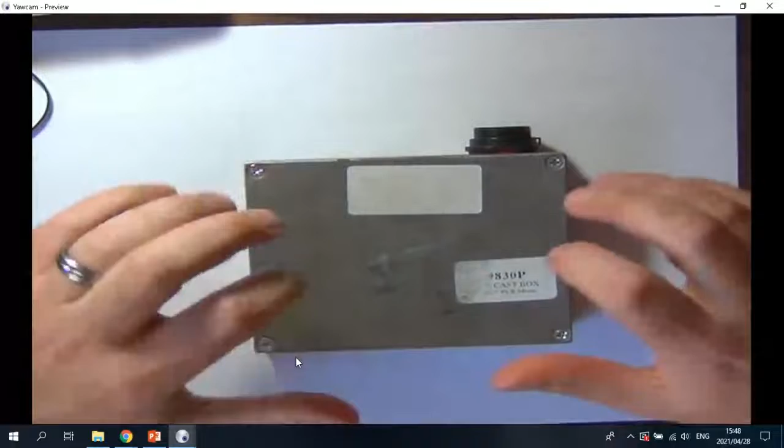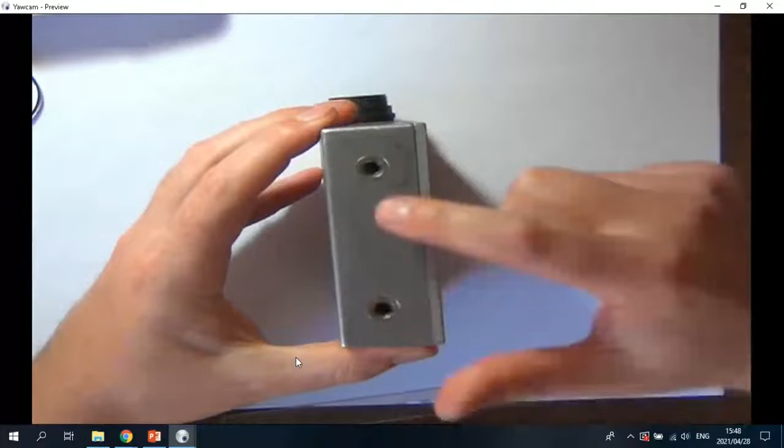Here we have a little box, and if we want to dimension it, we can give a main view, we can give the width, we can give the height, we can give the location of these screw holes, all of that. We can do a right-hand view, show the depth, you can show the draft angle if you want, because it's slightly smaller at the back than at the front. We can do a top view to show these holes. We can do a left-hand view to show those insert holes. We can do a bottom view. So for this shape, our standard views, main, right, left, top, bottom, and back, are actually sufficient to be able to dimension everything in this block.

But if we now have a component with a different shape, so over here I have my little precision scale. So there's the top view, and there you can see yourselves in the camera. Now you'll notice on this right hand side it is sloped. So if I wanted to give the dimensions for these 4 holes, I can't give it in the top view because they are actually at an angle. A very slight angle, but still an angle, meaning these circles are oval in the top view. And this rectangle, that line there, isn't the true shape.

So what I'm going to need to do is construct a view where I look straight at that surface. Typically something like that. So basically I'm holding it now with the front higher off the table than the back, so that we can view straight at the surface. So if I make an additional view straight at the surface, now I can dimension the spacing, size, and orientation of all of these features. So the normal main view, right hand view, and top view are not sufficient. I need to do some other extra view. And that is where our auxiliary views come in.

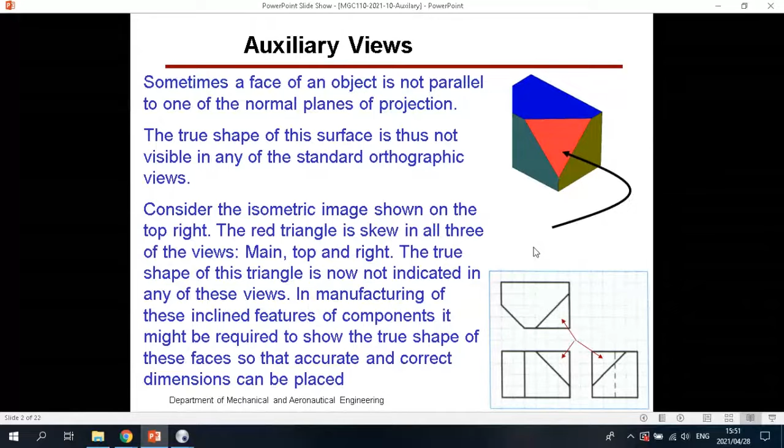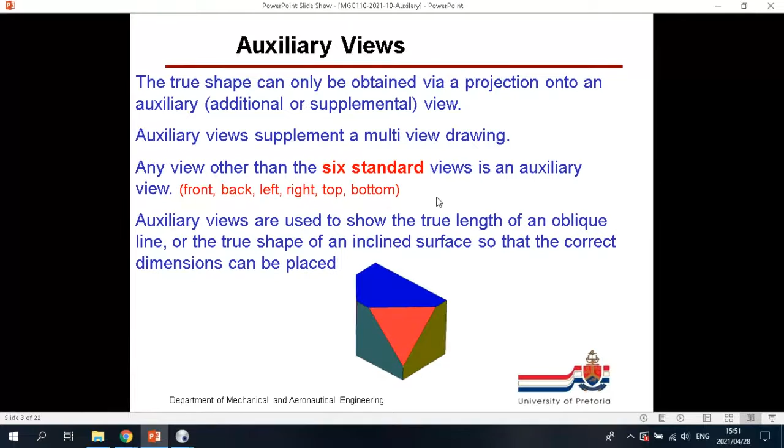Any view that is not one of your standard views, front, back, left, right, top, bottom, any view that's not one of those is an auxiliary view. Here's an example, a modification of that little friend of ours.

So we now moved the hole from this surface to that inclined surface. So if we wanted to dimension this circle, I'm just zooming in a bit. That circle in the right-hand view is oval, and in the top view it's oval as well, meaning we can't dimension that circle in the top or the right-hand view. Also can't dimension it in the main view because it's hidden detail.

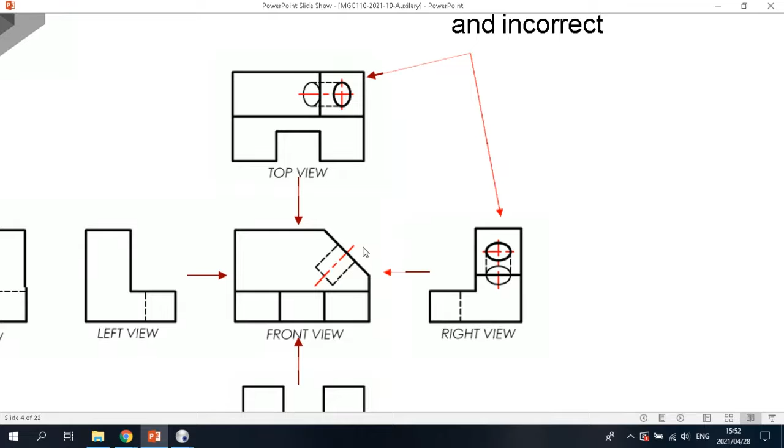We could probably make a little partial section and then dimension it like that, but that would only work if it's a circular hole. If it's a triangular hole, then all of them are useless. Then we have to make an auxiliary view to just show the detail there. So we look straight at the surface and project an auxiliary view to show the detail of that circle.

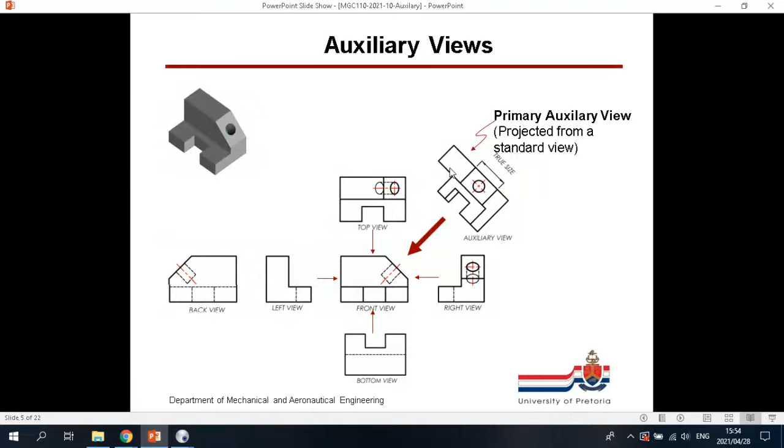So what I do is I make two partial views, a partial bottom view to show the radius over there, and a partial auxiliary view to show the hexagonal side. So sometimes it makes sense to only show the dimensionable features. This is where a partial auxiliary view is of great benefit. There's no point in us showing the entire background like with this one. Showing that thing there is pretty useless because this is all skew information. I can't dimension to that. So I just want to show the part that I can dimension.

So the hexagon is pretty easy. You just give the distance from that flat plane to that flat plane, distance from that one to that one, and the distance from there to there. If it is a perfect hexagonal shape, you can even give it a center mark and a constructed circle through all of its tips.

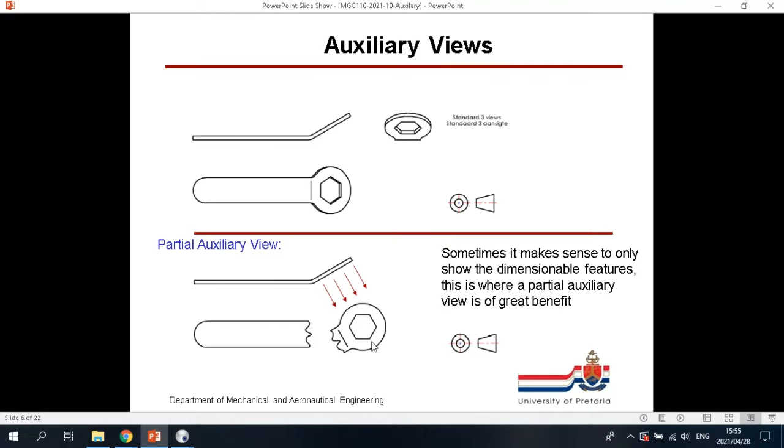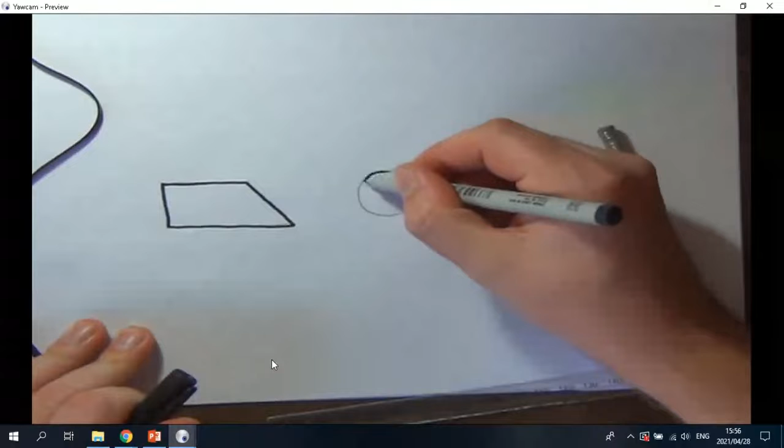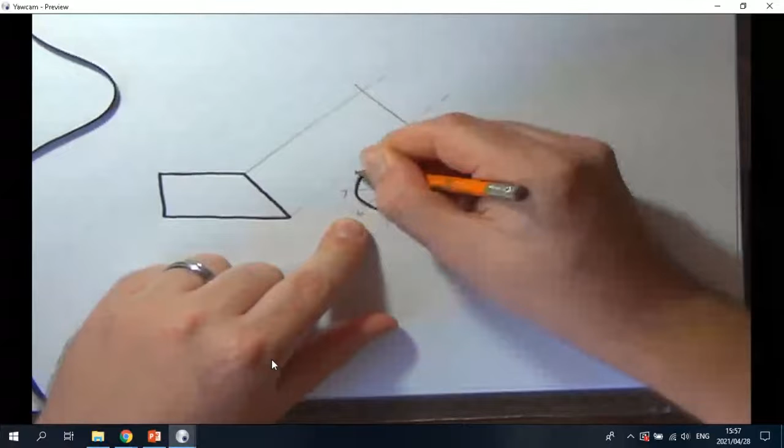Okay. So I want to project it at an angle so that I view straight at that surface. Now we must place this view somewhere. The exact location isn't important. So I'm just going to make a reference line over there. And I'm going to place a reference line, in this case, through the middle of the circle. The exact location of the reference line is irrelevant because it's just a reference. Now I'm going to divide the circle into 8 equal parts. There we have 8 equal parts.

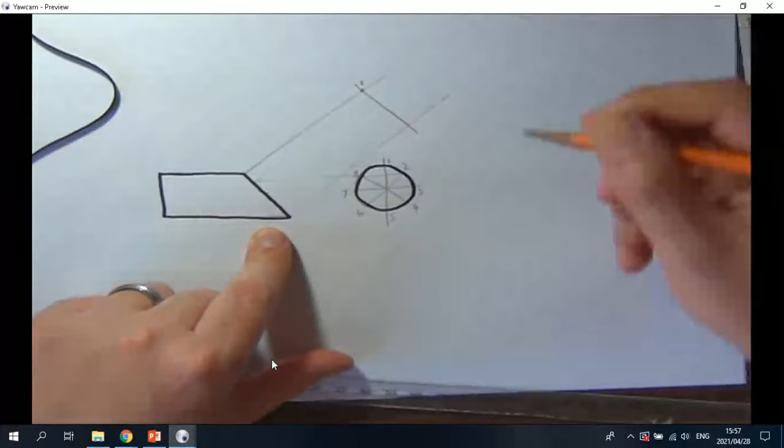And I'm now going to construct each of these points in my auxiliary view. So point number one lies on my reference plane. So I move it to this reference plane. It is still on the reference plane. There's point number one. Point number two. Now point number two is a certain distance from the reference line. I'm just using the ruler as an example. Obviously when we do this in class, we're not that worried about it. So that's about 8 millimeters.

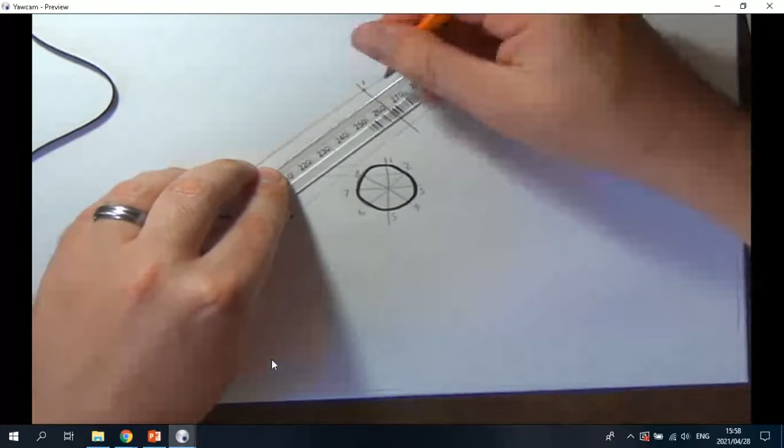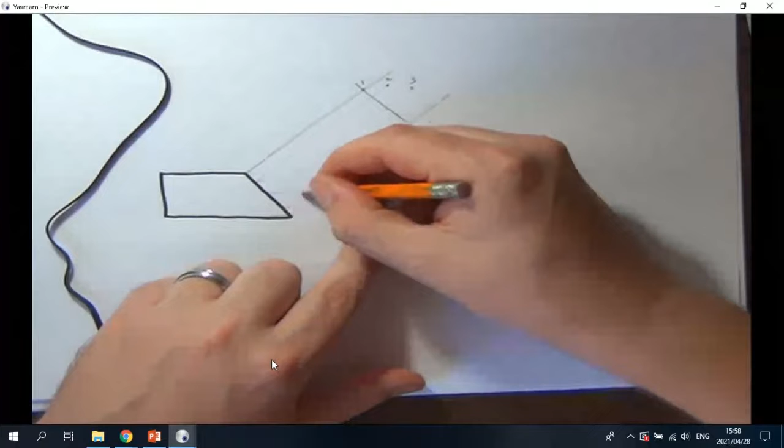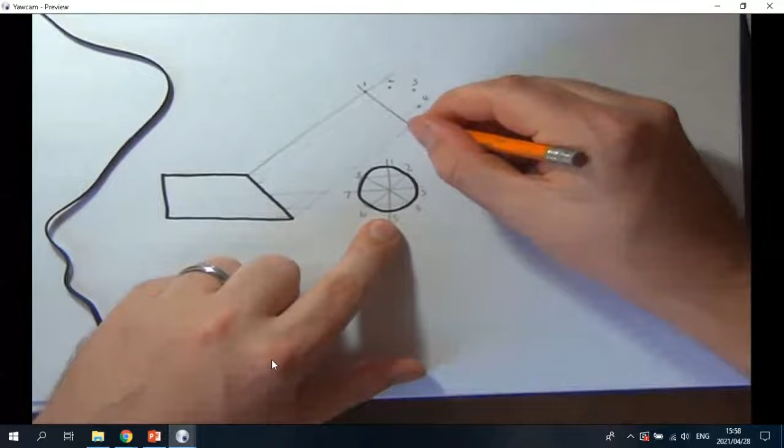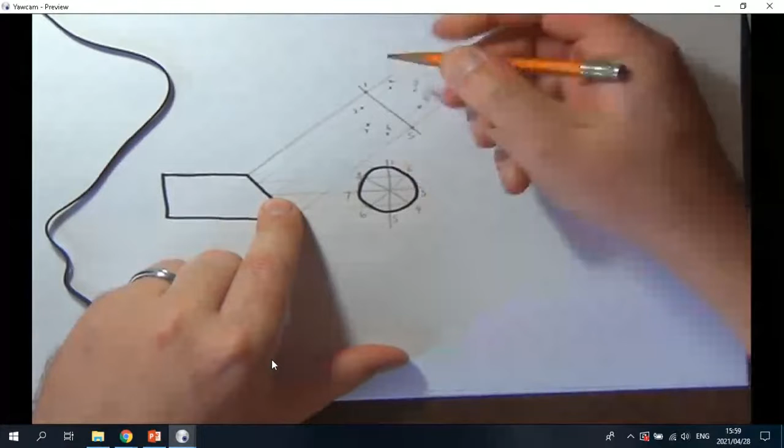There's point number two. Point number three is a bit further out. Point number four. Four and two are actually the same distance from the reference line. Point number five lies on the reference line. 6 is now to the left of the reference line. 7, 8. And now I'm just going to construct a smooth curve through those points.

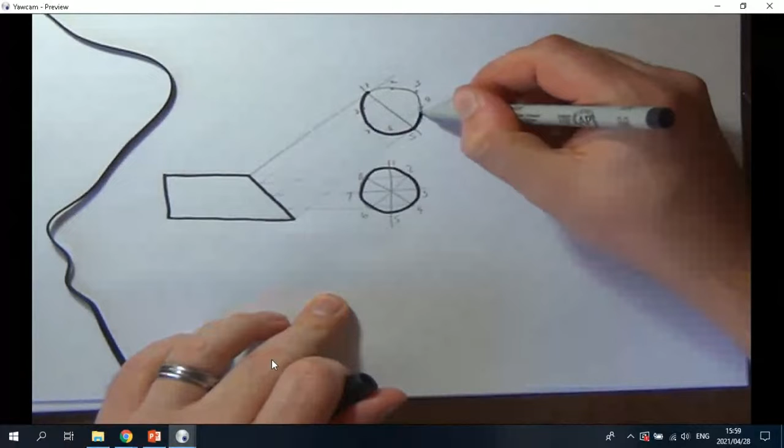Something like that. So that means that oval is now the true shape of that surface. You can see it's not circular anymore, it's slightly longer. If you wanted, you can even transfer the background information over. Okay, the background information isn't important at this stage.

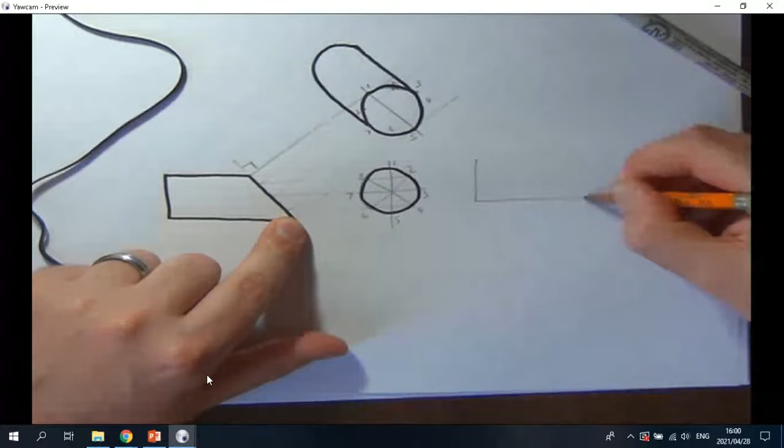So these lines are not specifically at 45 degrees. These lines are perpendicular to this surface. In other words, if the cylinder looked like that, then that angle would be 90 degrees.

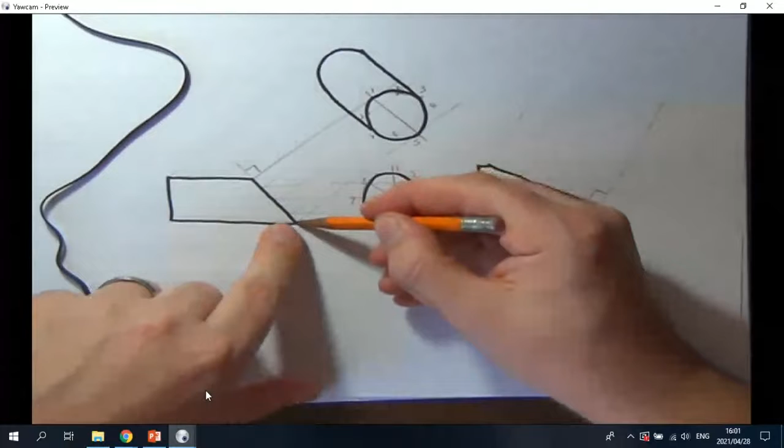So point number 1 and point number 5 lay at the top and the bottom of the circle, which lie on the reference line. So if I construct it over, that's where point number 5 lies in my main view. And perpendicular to that, that's where point number 5 lies on the reference line in my auxiliary view.

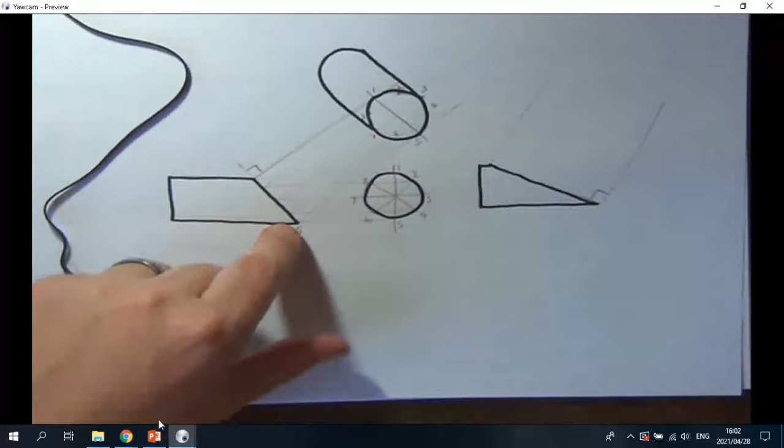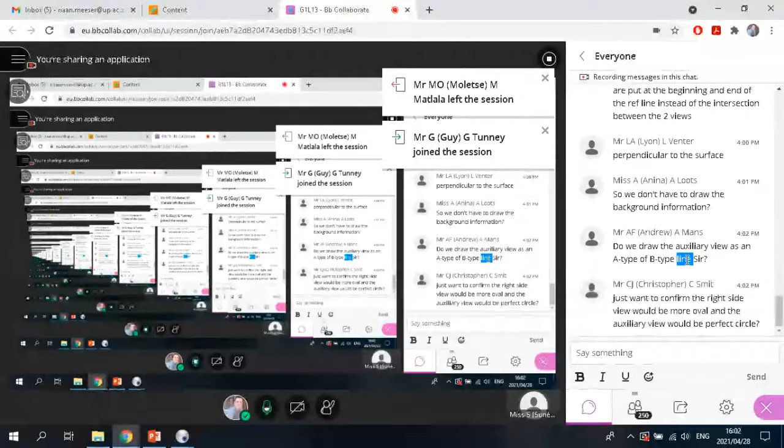No, you don't have to draw the background information. I just showed this process now so that you know where it comes from, or if you can't visualize it, then you at least know how to generate it. What is an A-type and a B-type line? A thick line or a thin line? All solid lines, outside lines are thick lines, and all construction lines are thin lines, which we erase afterwards anyway.

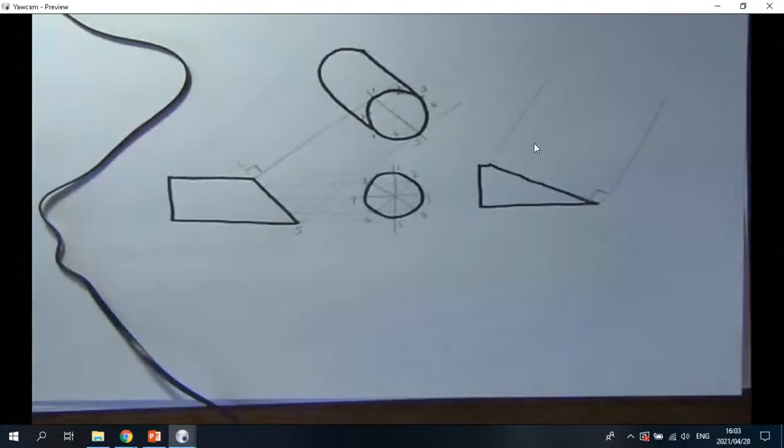So I'm assuming you're speaking of the right side view of that one. If this one is perfectly circular, which is what I tried to do over here, then this one would be oval, meaning the distance from 1 to 5 is bigger than the distance from 3 to 7. In the second one's case, it would even be a lot longer shaped.

So in an auxiliary view, we're generally going to do partial auxiliary views, meaning we only draw that which we want to dimension, and we don't do the background information, which is now skewed. Yes, we do erase our construction lines. Remember, it's freehand drawing, so you don't have to use construction lines for every little thing. I used construction lines now so that you guys can follow the reasoning. It depends on the question, but generally no, we will only do the partial views.

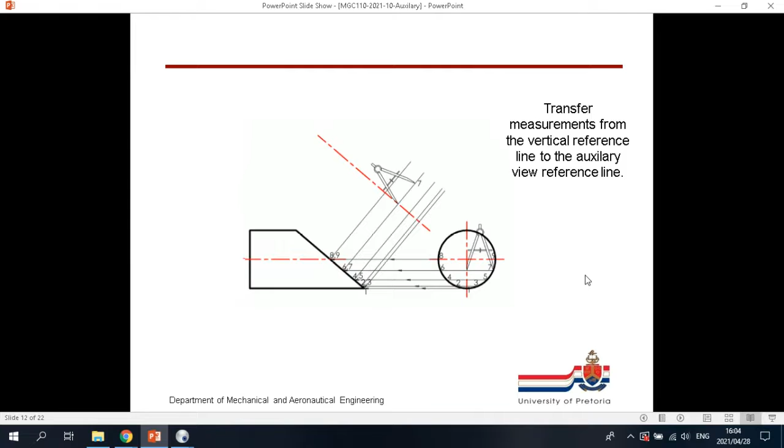Okay, so divide it into a number of points, transfer the information over, repeat for all the points, and complete it. In this example, again, we showed the background information, but we'll explain now why it's not necessary. It is useful to only show that segment of the view indicating the true shape of an object. So in this one's case, showing this cylinder in my top view would be useless because I can't dimension to it. Remember, our drawings are not made for fun, they are made for dimensioning purposes. So you want to be able to specify the size of the part so that someone can actually manufacture one exactly the way you want it to be manufactured.

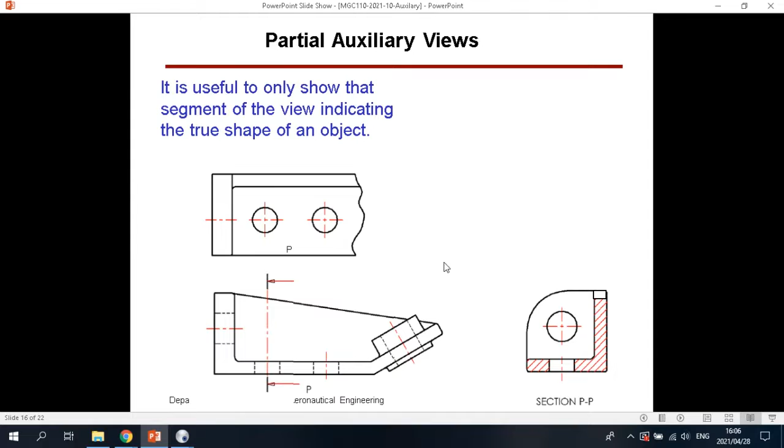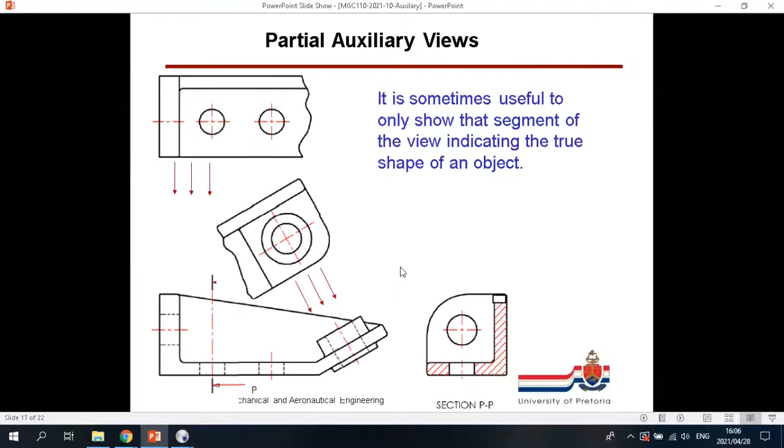So, partial auxiliary views is basically where you only show what you can dimension. So in this case, a top view would be broken off over there. We just ignore everything to the right of this broken line. But to show this cylinder, we make use of a partial auxiliary view. So we do a partial auxiliary view just of the cylinder and a partial top view just of the rest that isn't shown in this view. Please note the break line is a wavy, usually thin, freehand line, and it doesn't exit the part edges on the sides.

Generally, you might be marked down for construction lines. I won't guarantee that you will lose marks, but you won't lose marks for not having them. So rather just erase them.

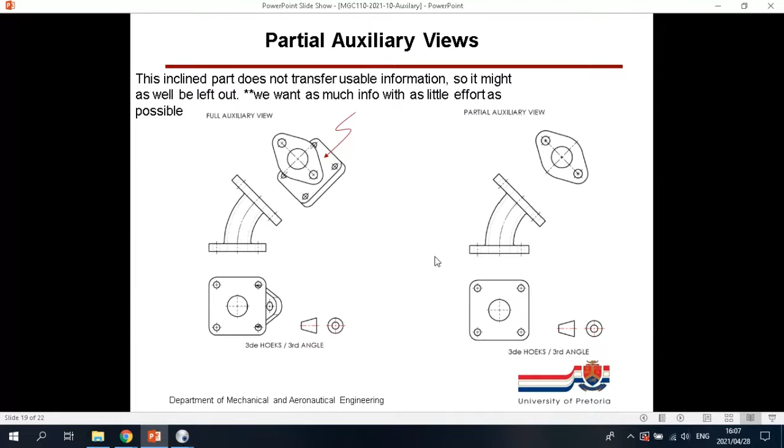Just another example of this. If there was enough space over there and the cross section didn't change in the length, you could have made use of a revolved section, but you could also just make use of a partial auxiliary section view.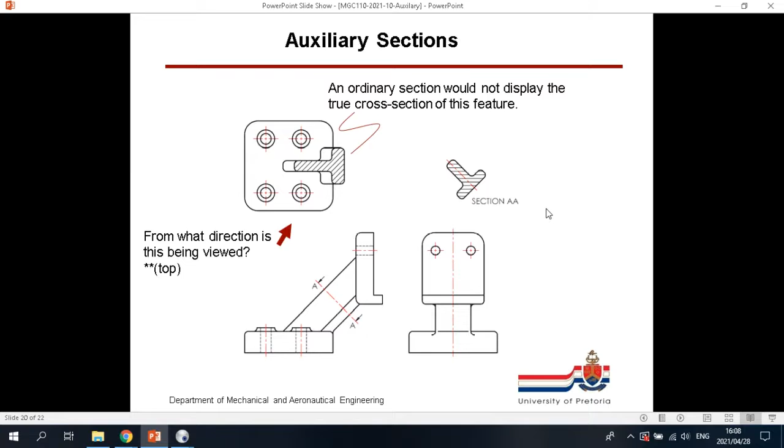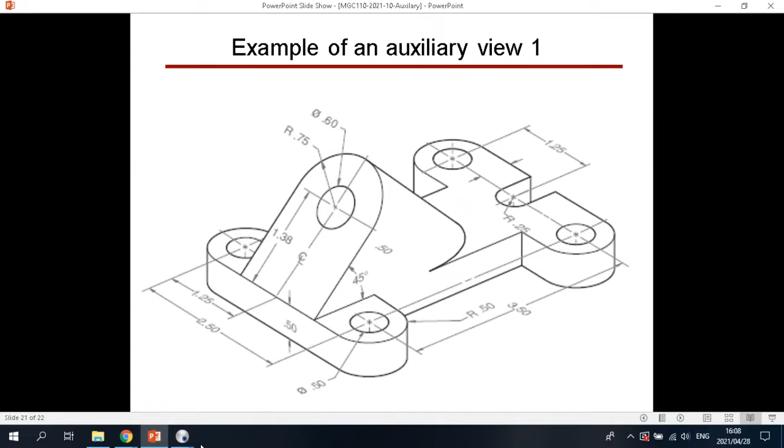So here is a quick auxiliary view example. Let's quickly do this one together and then we'll do another one as well. Okay, so there's the example. Now, let's start with the question. So we're drawing... that's our main view.

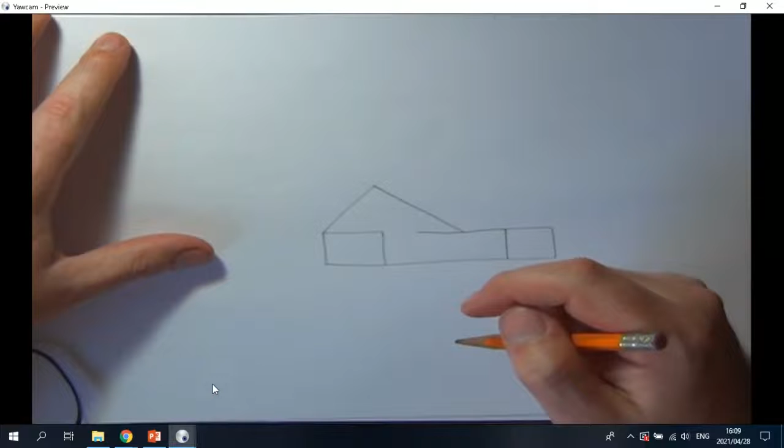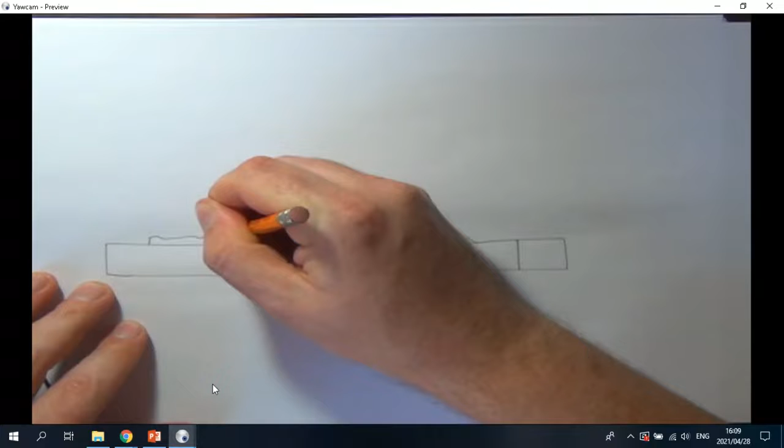Now, if we do a left-hand view of this, remember now that this information is a cylinder or a circle that's been tilted into the page. So now you see a round circle becomes an oval if you tilt it. Meaning showing this plane in the left view is kind of pointless, because it's not going to contribute to any dimensions in the view.

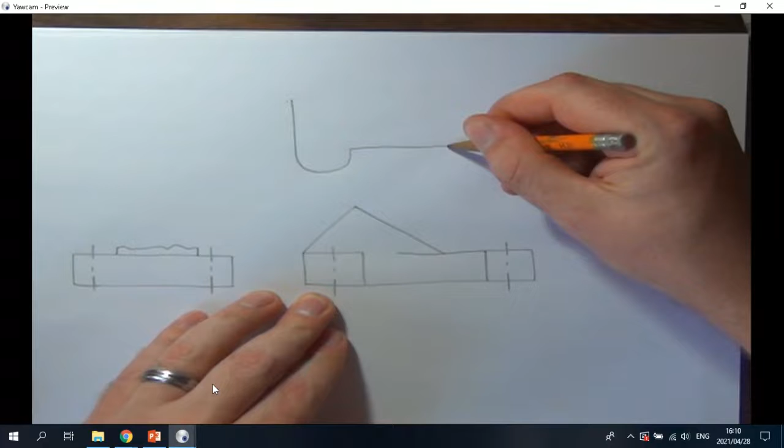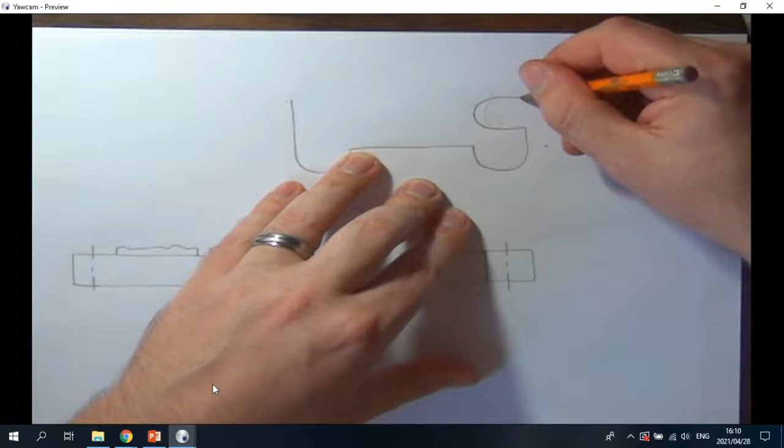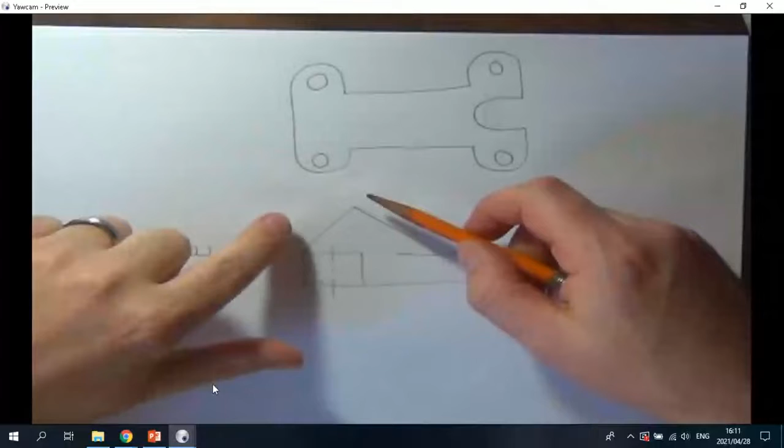We can also do a top view. But now the problem is with our top view, we can't do a partial top view because then we're going to kind of mess up the top view. You can't only draw a part of the top view. If I draw the right hand side, then I miss these holes. If I draw the left hand side, then I miss those holes. So in this one's case, I'm forced to still draw the skewed information.

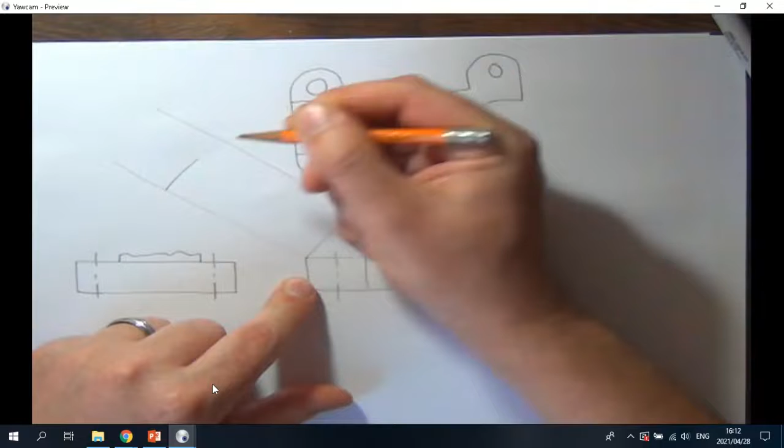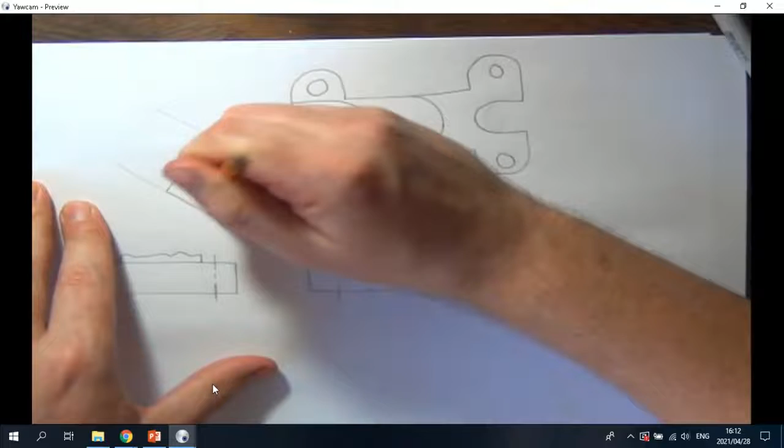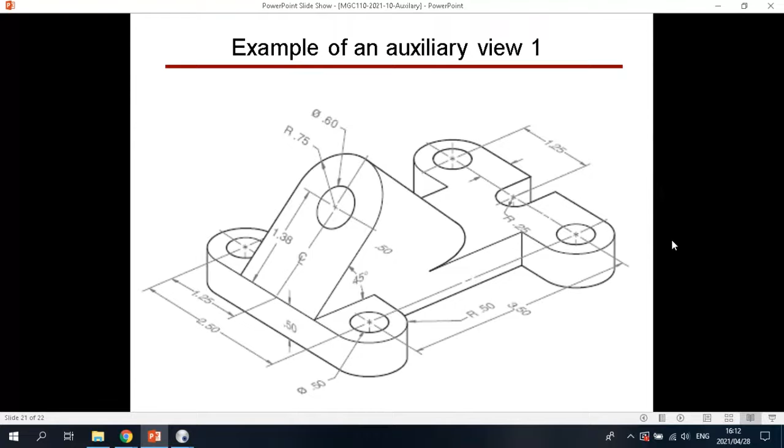Okay, this is now an oval. So to draw the true shape of this plane, I'm going to project perpendicular to that. Nasty skew line. So this is now a partial auxiliary view to just show the information on that inclined plane. I just want to quickly edit this radius over there. It was more right initially.

No, you don't have to draw the skewed info at least once. That's the whole point of the partial auxiliary view. It depends on the application. You'll see in the next example that we actually don't draw the skewed information once at all.

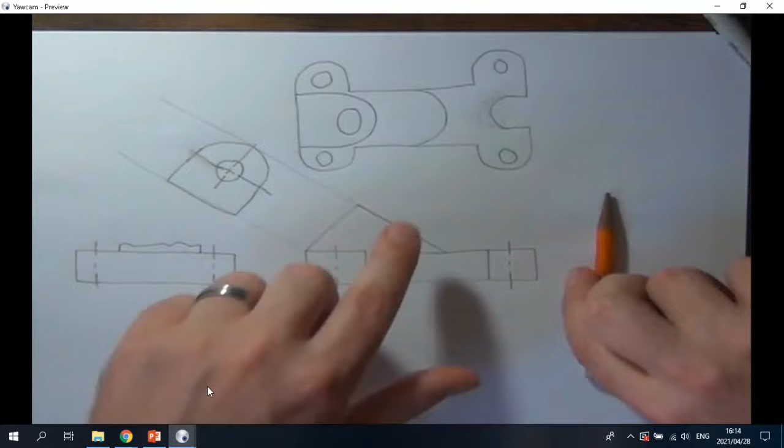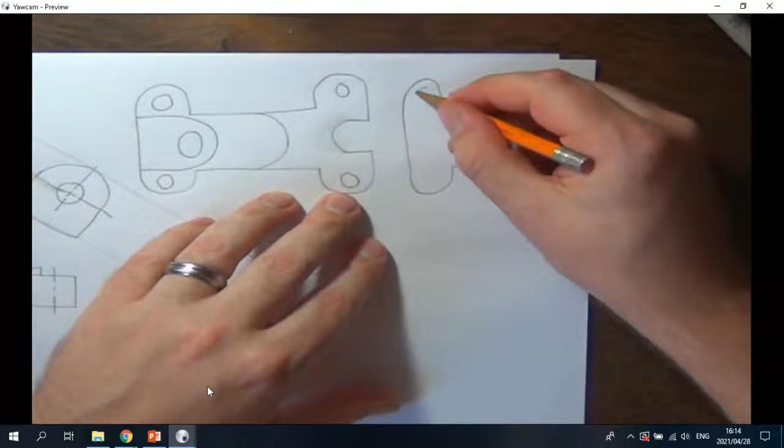I suppose you can add a sectional top view, but you won't really show better information than what you're doing at the moment. Remember now, if you make a sectional top view, let's say you make the section on this top surface over there, then the top view would actually be a lot more work to draw. I'm just drawing it quite rough now. And you're still going to end up with weird, hard to dimension features.

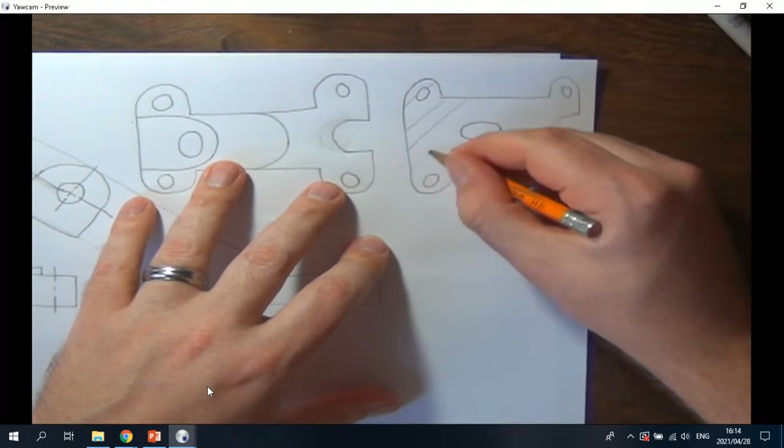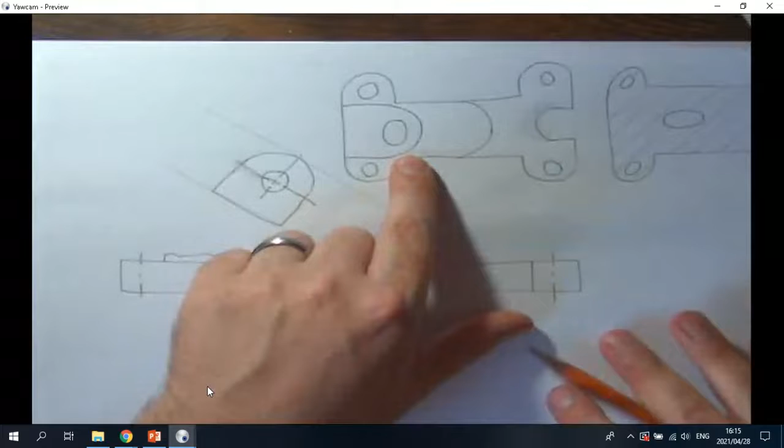Okay, so depending on where you made the section line, if the section line goes through there somewhere, that whole view will be hatched. So that's a lot more effort and less clear than what this skew information would have been. Yes, everything that we're going to do with weird shapes, we're actually going to try to make use of an auxiliary view to define the shape better.

So the question would usually be make an orthographic drawing of the question given and show all information, meaning you might need to make an auxiliary or partial auxiliary view to show all of the information.

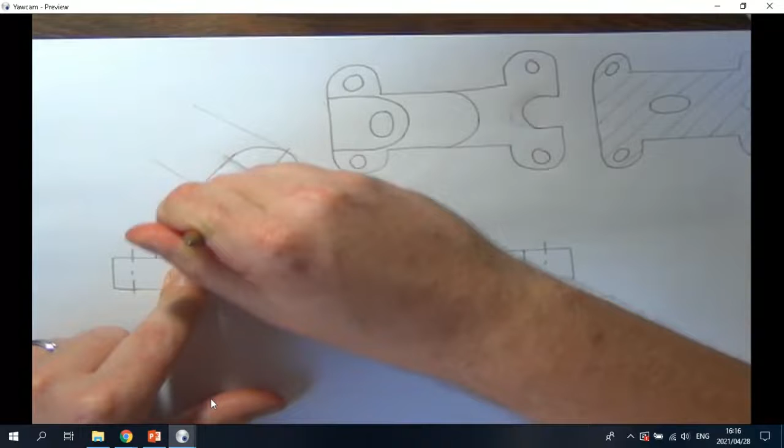Okay, so just to explain why the left view doesn't show the slanted information, one could add it over here, but you can't dimension onto that because it's skew. So there's no point in showing it there if you can't do anything with it. And that's why we ended up not drawing it. Okay, good. I'm going to quickly move on to the next one.

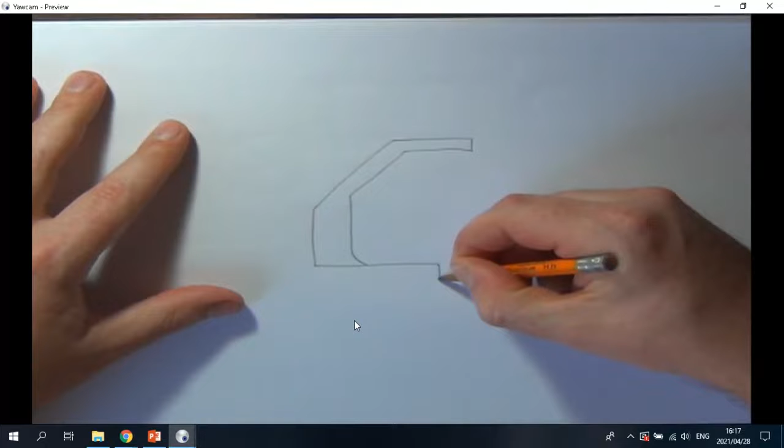So for this next one, we need to show all of the information in that drawing. And let me just quickly draw it for you. We're going to make use of a main view. And I'm just quickly drawing it and then I'll try to explain it before the time runs out. Partial top view.

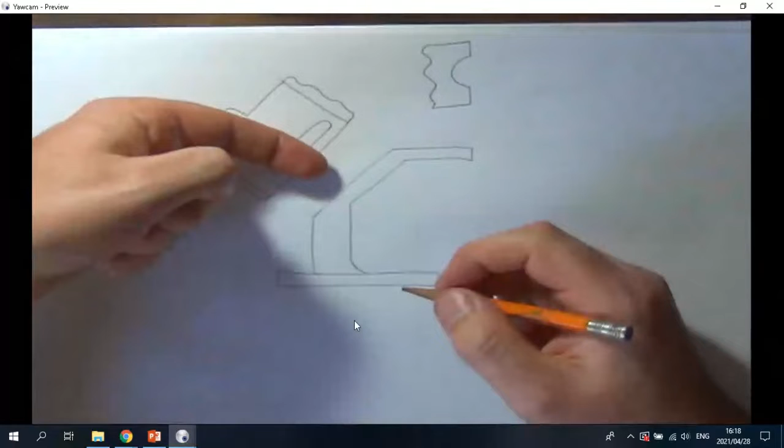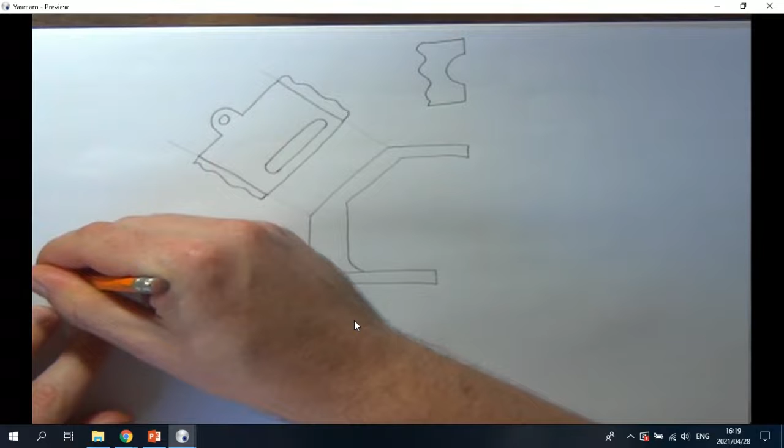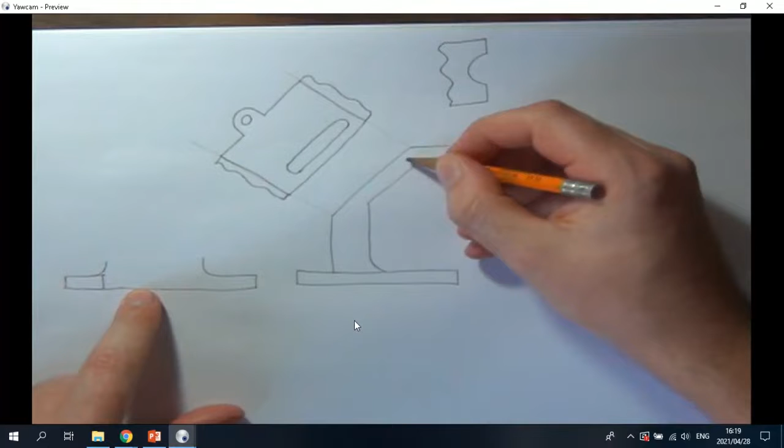Partial auxiliary view of that surface. And a partial left-hand view. Remember now all of this information towards the top is pretty useless information because it is at an angle. Last thing to do would be to add a partial bottom view.

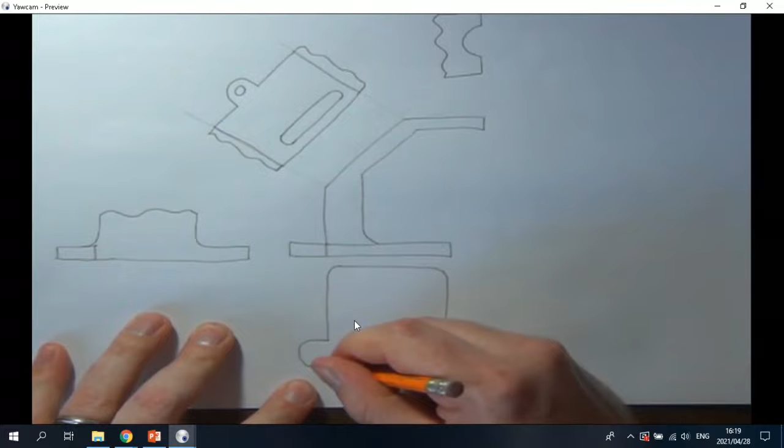Okay, something like that. Now, let me quickly explain what's going on over here. I chose a main view based on the view that shows the profile the best. If I chose this view as the main view, then I would have had to construct an additional view before I could make my partial auxiliary view. So that's why I chose this one as my main view.

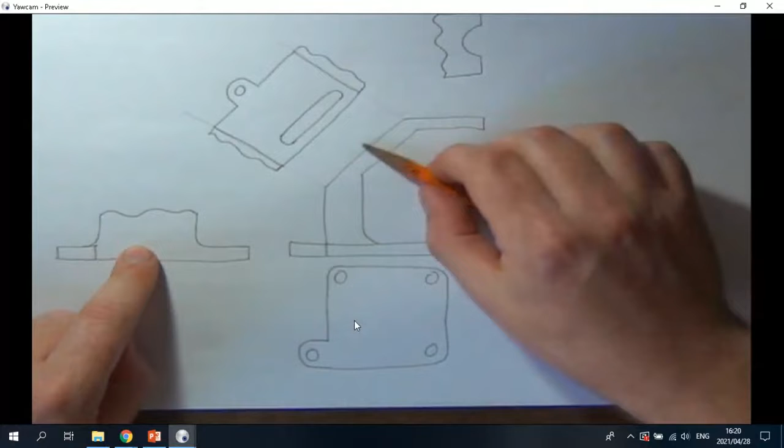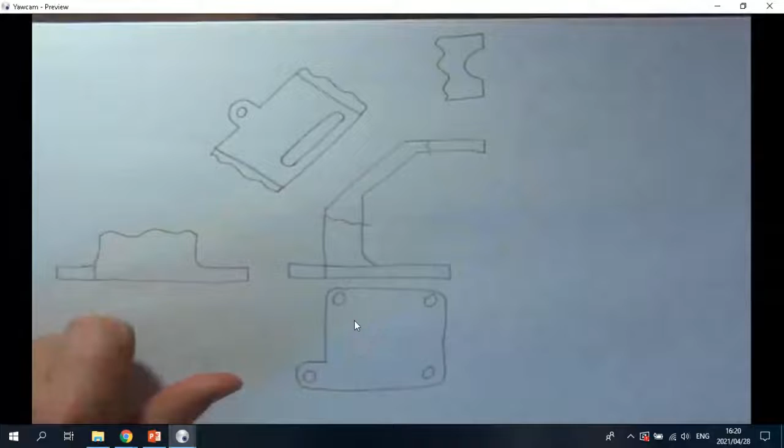Partial top view to show that semicircle over there. My break line was somewhere there for the top and somewhere there for the bottom. And that's why it's consistent in the other two views as well. And then you can add center lines, hidden detail, and dimensions.

Well, I suppose you won't specifically lose marks unless the question specifically asks for a partial auxiliary view, but the time you spent making all the background information is time you could have spent on something else, which might end up costing you marks. Okay, I just explained the main view thing.

Okay, so basically what I did is I did a partial top view just to show that, and I did a partial bottom view to show the bottom holes. I could have gotten away with a complete top view, but then I would have had to have all this skew information and the edge would have overhung over there. So I basically chose it that way just because it's clearer to do.

Typically in an assignment, we will tell you guys, do a partial view from the left-hand side, a partial top, a partial bottom, and a partial auxiliary view, as well as a main view. We'll typically describe it in the question. So no, there's no specific rule as to when you will use a left view or a right view. It depends on the question.

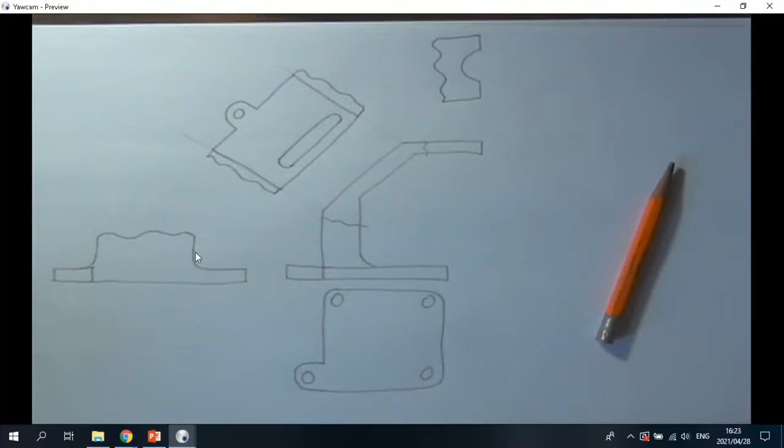So the break lines basically just show where the view stops and where other views will continue. So it's basically like zooming in. It's like when you take a camera and you zoom in so closely that you cannot fit everything into the shot. That's basically a partial view.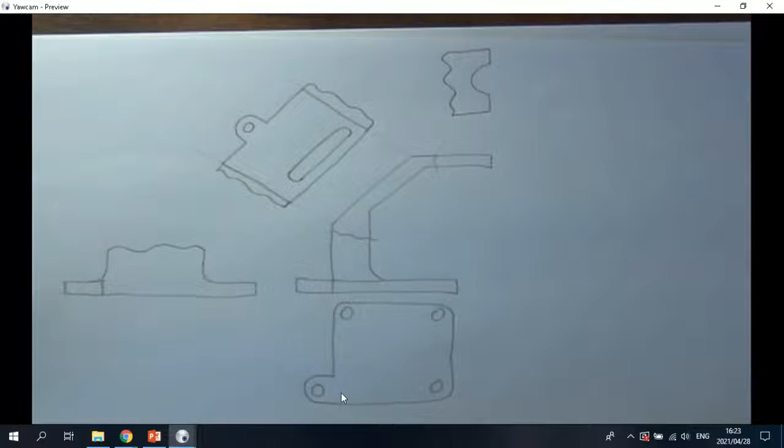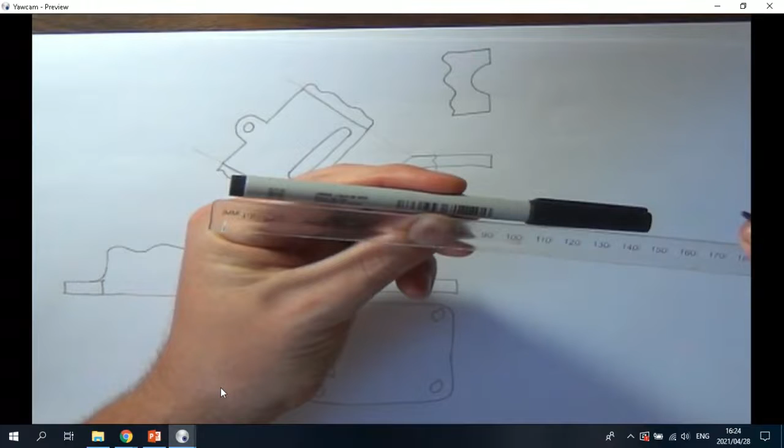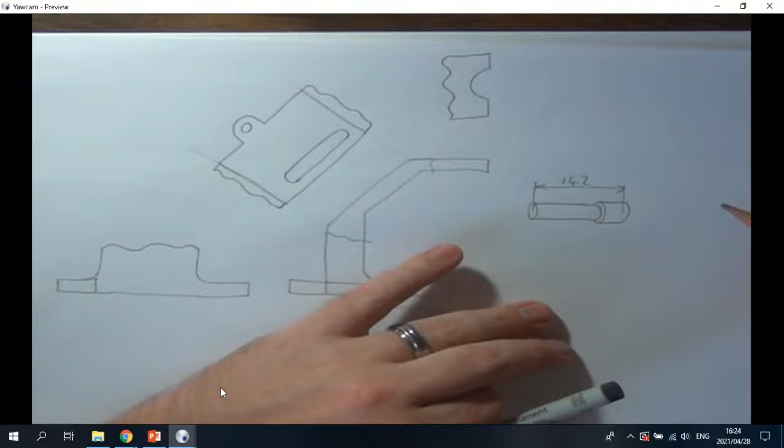Okay, let me show you why you can't dimension something that's skewed. Let's take this pen for example. If I want to dimension the length of the pen, it is 142 millimeters or something. If it's at an angle, placing the 142 like that is considered incorrect because now this line is actually not on the page anymore. It's floating in the air while the right-hand one is on the page.

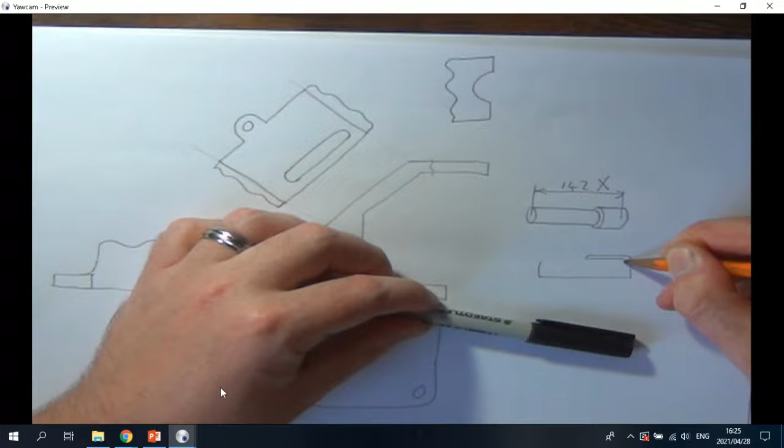Technically you can give the value, but practically speaking, what are you going to do if in another view you're drawing the cap and now suddenly in a different view the cap looks almost as long as the entire thing? So now I'm putting a dimension on this, which is 40 or whatever, but now my 40 and my 142 look almost the same, which means your whole proportion and scalability of the drawing is completely lost. So we never dimension to something that is skew.

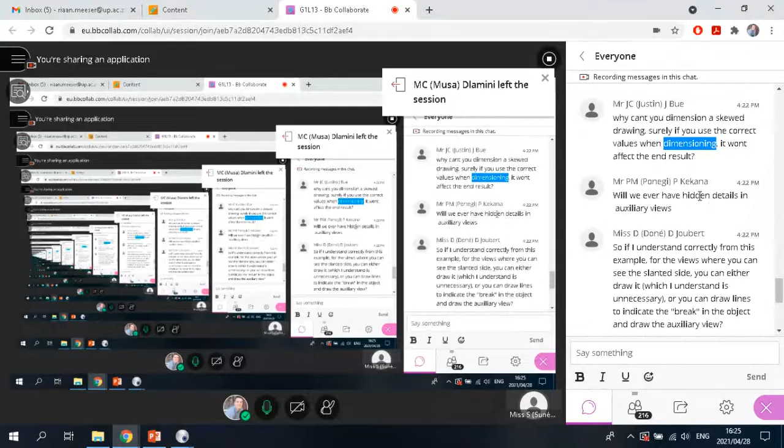There could be hidden detail in auxiliary views. It depends what you want to show. Yeah, so basically you do understand it, right? But remember that we don't want to draw the skew information because it's kind of pointless, it takes time and wastes real estate on your paper.

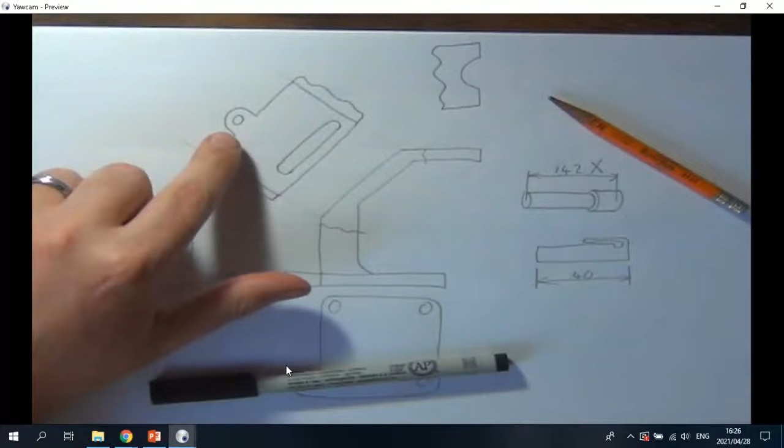So in this one's case, remember I'm looking at this surface. So my right hand side would be closest to myself. The left hand of this view would be into the page. So that's why this one lies on that side, because in this view it's on the deep side, it's not on the front.

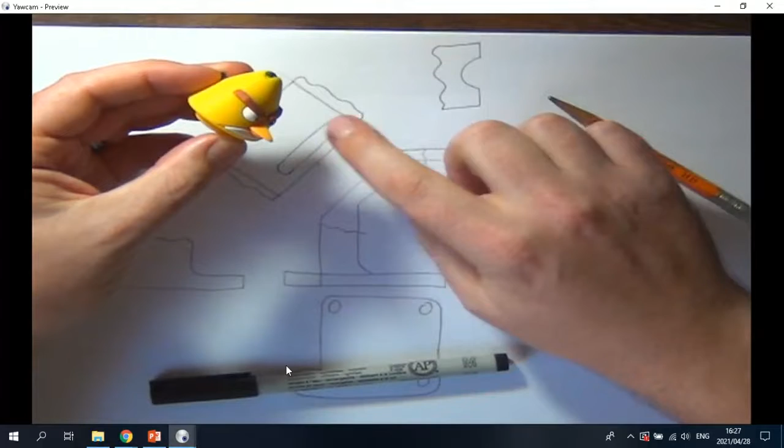So you must now imagine, let's say this is you, the observer. You're viewing it like that. So whatever you see on the right hand side is closest to yourself, and what you see with your left eye is deepest into the page. And then you draw what you see there. Okay. Yeah, so you can make use of whatever view necessary to be able to specify the information that you want to give.

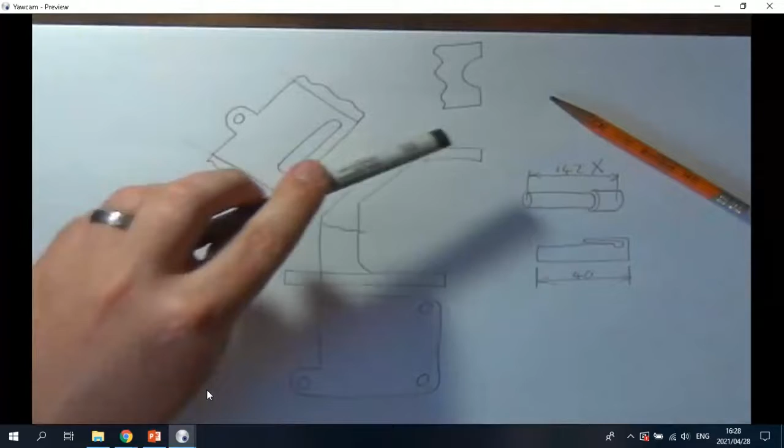So the auxiliary view won't be oval. If we just go to this example, that will not be oval, but this top circle, if I draw it there, will be oval. This one here, the top is over there, center of the cylinder is over there. Bottom, top, bottom, top. So in this one's case, it will be oval.

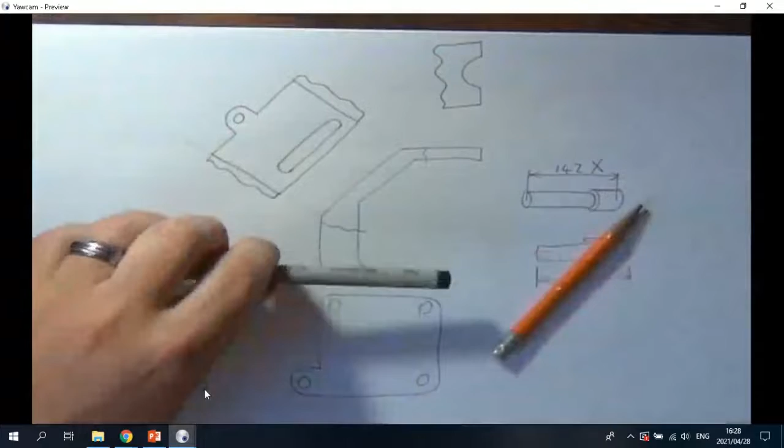We can show hidden detail in an auxiliary view. It depends on the application. In these ones now, it was not necessary.

So the advantage of using the break lines is it allows you to show where the component has a physical thing happening and where your view is broken off. If you put those in the same place, it might cause the person reading the drawing to not understand exactly if the straight line is the break or whether that is actually a feature that you're showing. So I suppose it depends on the application.